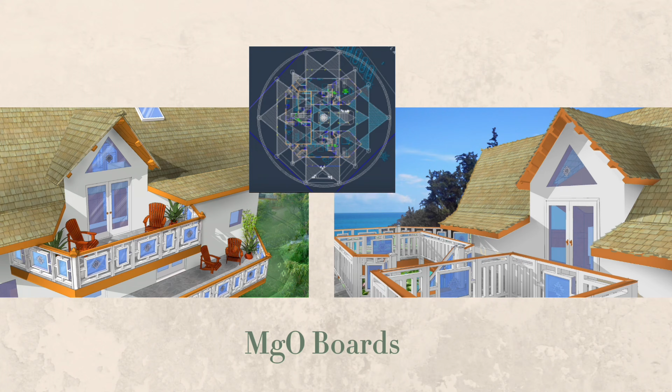I soon applied my architectural design skills to a multifamily project in Kauai where we used carbon-smart materials like magnesium board and Vastu techniques. So Vastu is the Indian practice of designing structures to achieve energetic harmony. I've always really been interested in these energetic design philosophies like Vastu and even Feng Shui. But for a time, I didn't really see them as that practical.

But the more I started to learn, I came to understand their true value. And I was eager to use them in my work. It would just be some time before I developed a reliable approach to do this. In the meantime, I spent most of my 20s managing a 10-acre property in Maui. It was there that I learned all the ins and outs of maintaining off-grid systems.

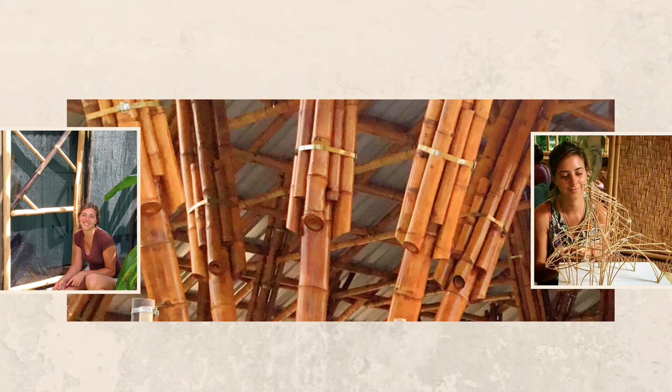I did a lot of hands-on building and renovating, and I even built my first house. At the time, I also lived next to a bamboo farm, and I would help them harvest the poles and build structures with the bamboo. I love bamboo so much, I went to Bali to study the traditional joinery of that craft and eventually worked for an architectural firm that specializes in prefabricated bamboo structures.

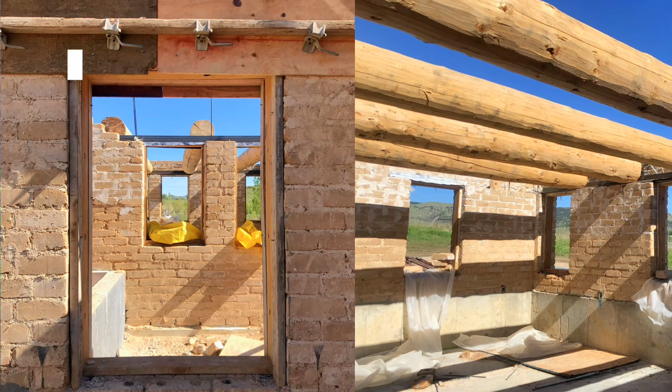Later, I moved to Colorado, a completely different climate, and so I started working with compressed earth blocks. So compressed earth blocks use locally derived earth under compression to make bricks. And so we use these bricks to design fire-resilient homes in that region. Today I work on projects all over the world.

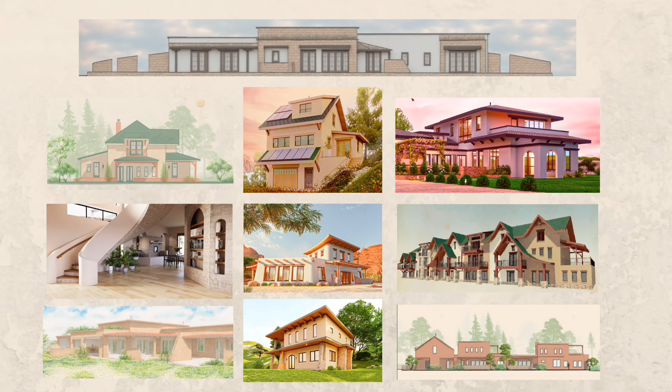I especially love larger rural projects that incorporate some kind of master planning where I can combine natural building, agriculture, and community components in a holistic way. I'm currently collaborating on a project in Kenya where we're designing a multi-structure complex using local materials and regenerative land management practices. I've also dialed in my approach to energetic design principles, and I call it elemental design.

So elemental design is this fusion between natural building, the traditional elements, and most importantly, understanding your climate. Climate-specific design is so important. It's frustrating for me to see buildings that don't use materials appropriate for their region. Elemental design aims to help people understand their climate, which results in more comfortable and durable buildings.

The natural building space doesn't have a lot of standardization, and so I wanted a framework that simplifies how we work with raw and natural materials. I wanted an accessible tool, similar to the way an artist would use a color wheel to draw parallels between color schemes. So in thoughtful design in connection with nature, our buildings have the capacity to be a force of healing, both for us and for the planet.

So my mission is to design places in alignment with the laws of nature, turning a building from a structure into a sanctuary. Sanctuaries are known for being places of refuge and healing. Its definition ranges from a wildlife sanctuary to even holy places such as a temple or a church.

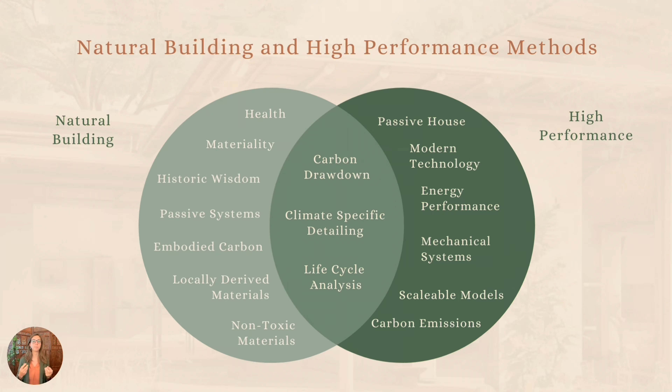So people on the natural building side are starting to embrace more high performance methods, and people on the high performance side are coming to see the benefits of materiality and embodied carbon choices. So what this typically looks like overall is carbon drawdown, climate specific detailing, and life cycle analyses.

Another pillar of elemental design is how energetic considerations impact our structures. Have you ever known something was off in a building but couldn't quite put your finger on it? When you look at its exterior or inhabit the space, it just feels wrong. This issue is often energetic.

Vastu and Feng Shui are both approaches to creating energetically harmonious spaces. Vastu Shastra is the Indian practice of spatial orientation, and Feng Shui is the Chinese approach. So these might sound mystical, but they actually align with practical building principles, such as ensuring adequate sunlight, ventilation, and thermal comfort.

Climate resiliency is the final pillar of elemental design, and this is what we'll really focus on today. This is a big one in the natural building movement, especially because a lot of people like a material or know how to work with a material, but it doesn't match the climate they want to build in. So we really want to understand the ecoregions. It's not just the big four climates. There's a multitude of microclimates within a region.

We're also going to look at site-specific design, really understanding the topography, the trees, the neighbors, all the landscape features. And thirdly, we want to prioritize land management. A lot of our designs are just about the house, but we have to prioritize the land first. How will we support a thriving ecosystem on the land? Our buildings should be designed based on how well nature will thrive around them.

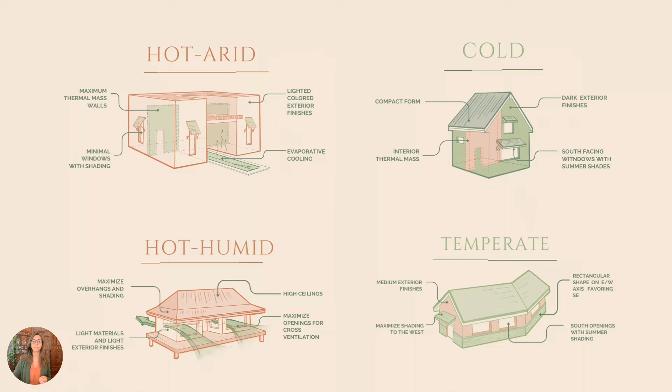So when we talk about an element, say water, we're not just referring to an ocean, river, or even the rain. Water also appears in our buildings as coldness, humidity, condensation, and even dew points. So, in the context of building, we also see that wood is correlated with framing, fiber insulation, and air. Fire relates to the sun, heat, combustion, and fusion. Earth is seen in stone, clay, minerals, foundations, and lime plasters. And metal we see as electricity, technology, and human innovation.

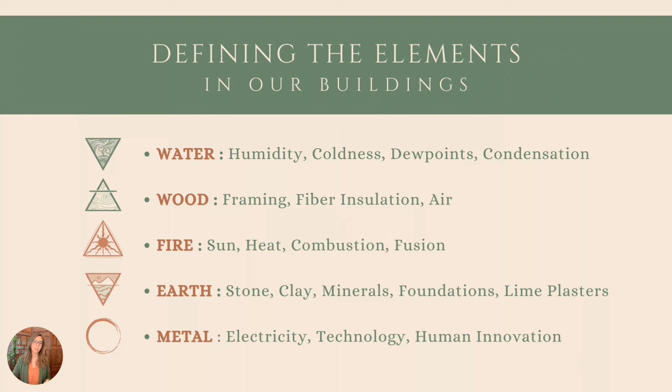When we look at the ancient Taoist philosophy, we find the concept of Wu Xing, and it dates back to 700 BC. Wu Xing is all about creating balance where each element is controlled and supported by the others. The elements relate to one another in different patterns called cycles. Once we understand the cycles, we can use them to relate our buildings to our climate in meaningful ways.

So, this is important because when we design a structure, we want to balance the elements we're using. For example, if we're building in a hot and dry climate, we can look to water and earth to balance out the harsh aridity of the surrounding landscape. When an element is deficient, we can look to the generating cycle.

In Wu Xing, the generating cycle, sometimes called the nourishing sequence, shows how each element supports the next in the cycle of creation and growth. The generating cycle is nurturing and supportive. In essence, it creates life. And so, in this way, it's often considered the mother cycle. An example of this in the context of building would be adding a metal roof for rainwater catchment and gutters with the metal element to channel and store water for domestic or agricultural use.

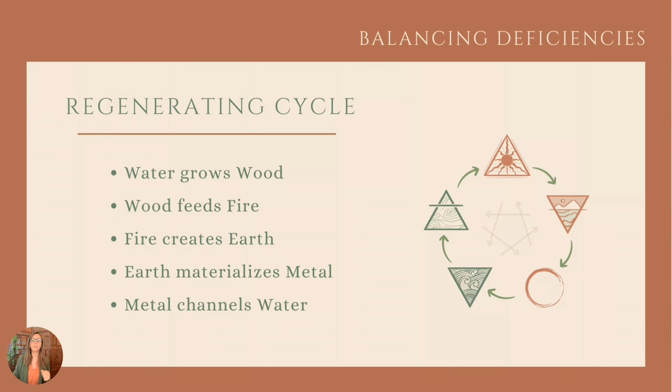So, if an element is in excess, we can look to the controlling cycle or the destructive cycle. In the controlling cycle, the elements keep one another from dominating. This ensures that no single element becomes overbearing. You can think of the controlling cycle as a regulating, calming, restraining, and even limiting force. It's also known as the grandparent relationship because when a grandchild becomes overenergized, the grandparent can come in as a dominating yet wise counterpart. So, one example of this would be using wood to provide additional tensile strength to a strictly earthen wall, like using straw in a cob wall, for example.

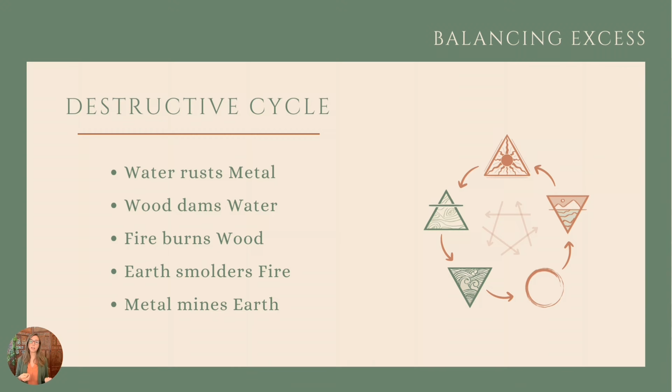The destructive sequence illustrates how the elements can destroy each other. The destructive cycle is a depleting and deathly force. However, it is not considered a negative thing in Wu Xing. Death and dying is a part of the natural cycle, and so we can use it to help balance out these excess elements. One example of this in the context of building would be using earthen materials in a forest fire prone area where the fire is in excess, since in the destructive cycle, earth smothers fire.

The five elements also correlate with specific climate conditions. For example, water is associated with coldness in the winter season. In architectural design, this can manifest in considerations for insulation and thermal control layers to manage cold temperatures and prevent condensation. Let's consider how the element water can affect our buildings and designs.

Water is the first element in the Wu Xing phase, and it's essential to life. But when it comes to our building envelopes, it can get a little tricky. Water must be very carefully controlled. Waterproofing is often the first thing we consider when designing or selecting materials for a building. It can come from exterior weather conditions and interior sources like cooking and showering. To manage water effectively, we focus on two crucial building control layers: waterproofing and vapor permeability.

Excess water is present in climates with high humidity, consistent rainfall, and even many days of cloud coverage. If we have too much water, we can control it with earth. Earth includes inert, non-biodegradable materials like stone, clay, and minerals, and it can overcome water's challenges. The banks of a river contain and channel the flow of water. So, in natural building, our water control layers are often some kind of plaster, which is an earth element.

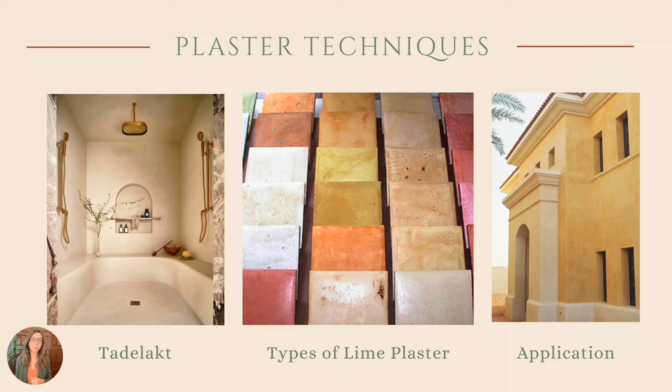In Wu Xing, there's a cycle I haven't touched on yet. It's the inner cycle. So in this case, it's a combination of the destructive cycle and the controlling cycle, acting simultaneously. So one unique climate we can look at for mitigating water is hot and humid climates. Absorbing humidity through clay, silica, cork, or other means is not enough because these materials can only absorb so much water.

It's difficult to use fire, like solar or a wood stove, to dehumidify if the climate is already inherently hot, right? So even cooling tubes, which can cool the space, will not always dehumidify the air enough. So we need to look to mechanical means in this scenario. Elemental design in the inner cycle backs this up. We see three relationships in action here: fire reducing humidity, heat powering the mechanical system, and the mechanical system absorbing the humidity.

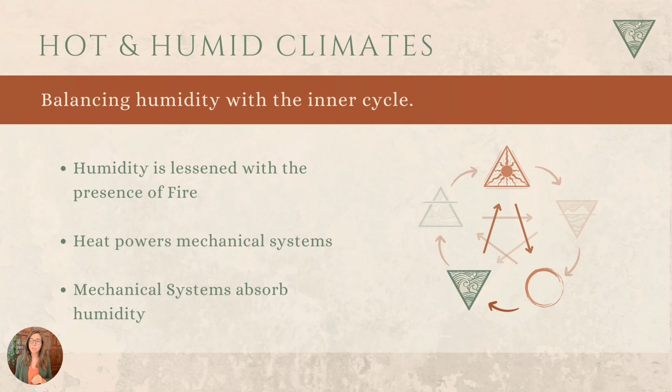We've discussed how to balance an excess of water, but what about a scarcity of water? We do this by harnessing the power of metal, also known as ether or innovation. Metal elements can help to channel or contain the flow of water. We see this in pipe systems and in rainwater catchment, flashing, and metal roofs.

This is essential in dry climates where they don't want the water to evaporate, and so they pipe it to keep it running and abundant. I'm not sure if this is a good solution across the board, but it's a good example to show how metal can protect the scarcity of water as a means of containing it. So let's move on to the next element, wood.

Wood refers to any plant based or biogenic material. The porous nature of wood gives it insulating properties, which is often why it's sometimes considered air. It also has a unique ability to sequester carbon from the atmosphere. So here are some examples of the use of wood in our homes. We see straw bale, mass timber, cross laminated timber, and hempcrete.

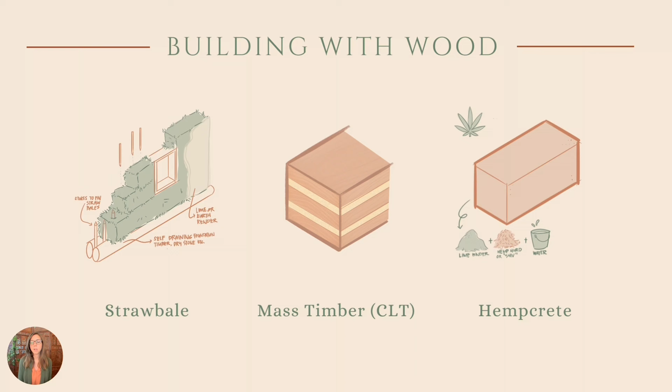One reason they're so popular is due to their insulating properties, carbon sequestration, and in some cases, the use of agricultural byproducts, which also contribute to a circular economy. Another way to look at wood as air is through the carbon cycle. Wood has an incredible capacity for sequestering carbon. As a tree grows, they absorb carbon dioxide from the atmosphere, storing it within their stalks, roots, and leaves.

As wood grows, it goes from being mostly water to solid wood to mostly air. And then when it's ready to go back to the earth, it releases its carbon. So that's why harnessing it at its lightest stage, right before it shifts to releasing carbon, is how storing the wood element in our buildings not only insulates, but keeps the carbon from being released back into the atmosphere.

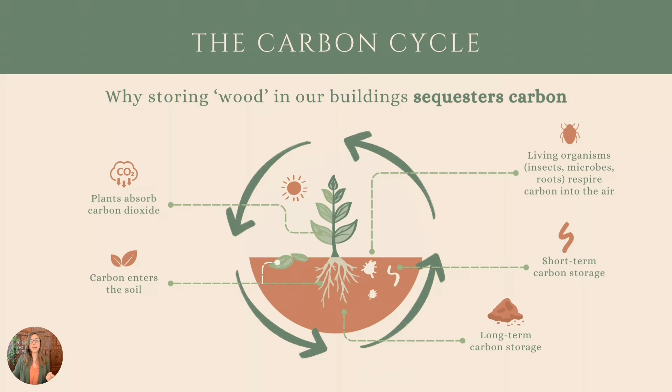When there's too much wood, we look to metal. Proper forest management not only improves the health of the forest, but it helps us shape our homes. By cutting back and thinning the forest with the metal element, we actually create space for more life to grow. We see this with coppicing.

Many trees thrive on being cut back, sometimes all the way back to the stump. This becomes a vital resource of biomass to improve soil health. It also helps mitigate wildfires and becomes an abundant source of building material. When we build with wood, we often need screws, fasteners, and brackets to assemble them efficiently. These not only provide extra reinforcement, but can be useful for seismic and structural considerations.

Having too much wood in our homes, while beautiful, is not necessarily practical in the eyes of elemental design. During my time living in the tropics, I became savvy in building with bamboo, a wood element. I was captivated by its rapid growth, its abundance, and its remarkable strength.

After visiting Bali and learning the joinery techniques, I realized two things. First, this was a highly skilled job, and second, it was a dying art among the coming generations in Bali. And as much as this saddened me, I was also impressed by newer technologies that make building with bamboo simpler and more cost effective. Back in Maui, the bamboo construction consisted of tying bamboo poles together with metal strapping. So, this is an example of how wood can be balanced with metal.

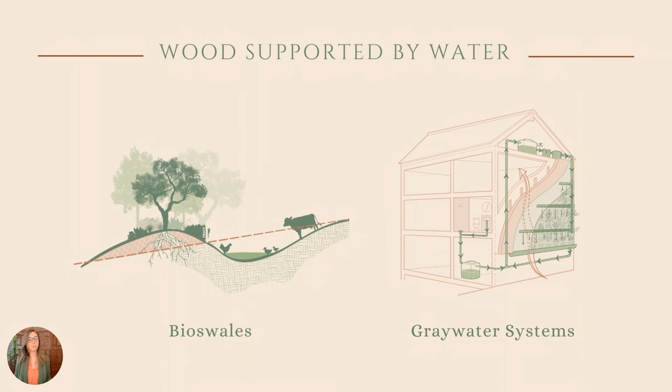Our next element is fire. Fire represents heat, energy, and light. In the context of building design, fire is both a vital resource and a potential hazard that must be managed carefully. My friend Mel broke my heart when she described watching her beautiful home burn down. She said it lit up like a tissue box. Actually, I knew a few people who lost their homes to a fire that year, and it was a reminder of the extreme flammability of wood framed homes.

This experience reinforced my commitment to designing with more climate considerations and using fire resistant materials like earth in these types of climates. So, if there's too much fire, it's controlled with water. So, here we're going to look at evaporative cooling, humidity and pressure, how we can move air, and wildfire resiliency.

Do you ever notice on a really hot day that simply being near the water feels refreshing? You don't even have to go swimming or even touch the water, and you still get that sense of relief. That's called evaporative cooling. Evaporative cooling works best in climates with low relative humidity. So you'll see these techniques mostly in hot and dry climates. For example, a pool can simply cool the air around it as the water is evaporated. If a fan or a breeze is directed over the pool, it can pull the cool air into the spaces that need it most.

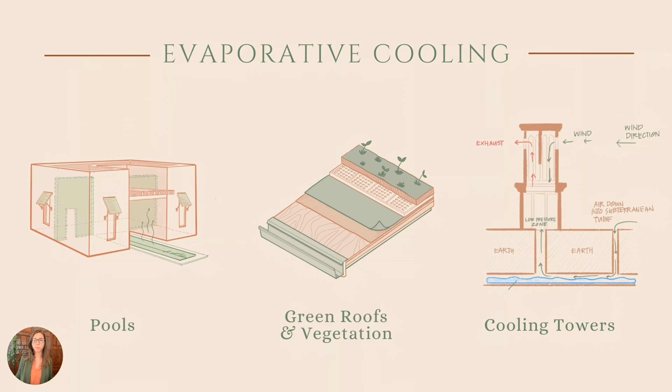And cooling towers can be designed in really hot and dry areas. These towers and tunnels capture the prevailing winds and basically replace the hot air below. And then at the same time, they have these channels of water running below the ground. And so it sucks up the air from below and has this passive evaporative cooling effect. So water actually moves air.

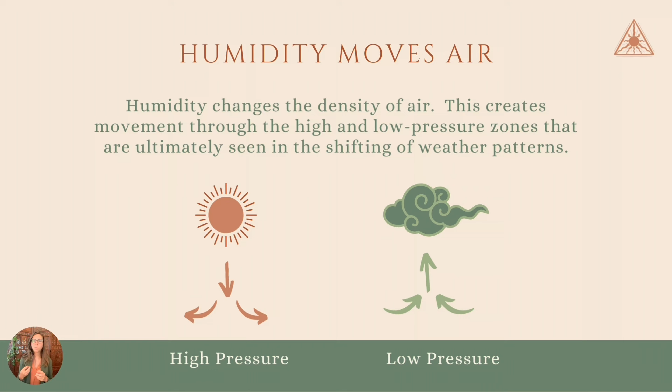Humidity changes the density of air. So this creates movement through the high and low pressure zones that are ultimately seen in the shifting of weather patterns. So when we're designing for passive ventilation, we're looking for those high and low pressure zones. In this case, water is acting a little bit like air. You'll hear in the passive house community that air is considered lazy. And while this is true, there are still passive design systems we can implement to create high and low pressure zones, which convince that lazy air to move.

Breezeways are a great example. They create high and low pressure zones. So if you have a prevailing wind coming through a breezeway, that creates a high pressure zone. And then if you have those windows and doors open on either side in a low pressure zone, the air will be moved through passively because of that pressure differential created.

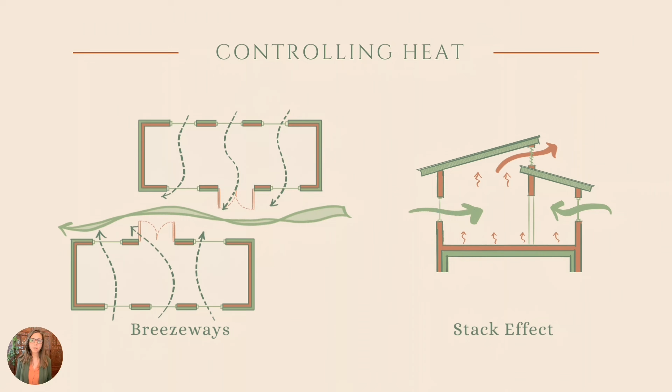Another example is the stack effect, which is also called the chimney effect. So warm air in a building rises, creating a low pressure area below. As the warm air exits through the openings in the building's upper level, cooler air is pulled in through the openings in the lower level. This creates cross ventilation of cool air through the space.

You can also vary the location and size of the openings, forcing the air to take a less direct path. Air movement will increase inside the space when there's more twists and turns. Changing the path of prevailing winds can also be achieved by using vegetation or other man-made objects. The Venturi effect is when the speed of air increases as it's funneled through a smaller space. So, this can also increase the passive cooling effect.

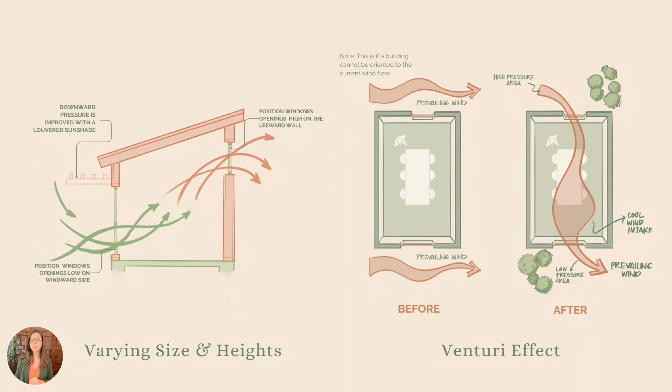It's good to remember that these types of systems require occupancy involvement, like adjusting the sails of a ship. We have to open and close windows depending on the external circumstances. Hopefully, in the future, with human innovations, these systems can be automated with the option for manual use as well.

I want to sidestep over to fire resilient design while we're on this topic of controlling fire. So, here we see the destructive cycle at work to mitigate wildfires. In this case, earth smothers fire. So, we can use earthen materials such as lime plasters, cementitious boards, etc., surrounding all areas of the soffits, walls, and roofs. If fire feeds on wood, we can look to the reverse by minimizing its use.

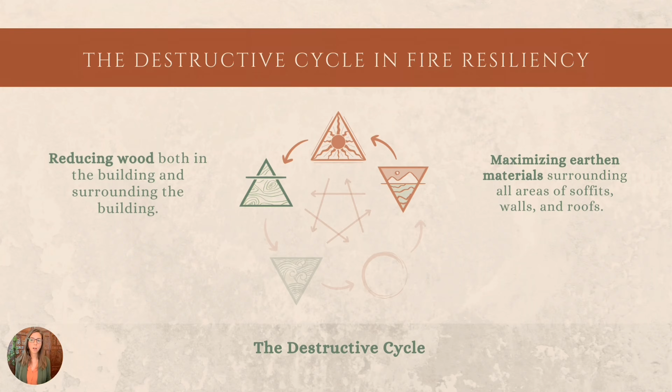We can trim woody overgrowth in surrounding landscaping and minimize the use of wood overall on the exterior of the building. If we don't have enough fire element or heat, we're going to address this with wood. Wood stoves are a great example. Even though I know they're catching some flack, especially in cities where people worry about carbon emissions. I get that. But out in the country, if you're surrounded by trees, it seems a bit unfair.

While burning wood does release some CO2, it can be sustainable if we're smart about how we harvest it. Also, modern wood stoves are super efficient. There's safety concerns, but as long as you follow the rules of proper ventilation, dry wood, and a good stove, you're good to go. Wood can also help store heat when the wood element is used as insulation, like we discussed before.

When there's a scarcity of fire, we can also look to the regenerative and controlling inner cycle of wood, fire, and metal. For example, when we fan the flames, we can move air via a fan to ignite the wood and create warmth. Circulating air here is critical to distributing heat throughout the home. Passive solar is another good example of this in cold climates.

So, by using our own ingenuity, technology, which represents the metal element, and the shaping of structures with wood, we can increase the solar heat or fire element within our homes. So, here's how we can achieve passive solar design. First, let's align our buildings 10 degrees to the southeast, or northeast if you're in the southern hemisphere, to maximize the morning solar gain, warming the building when it needs it the most.

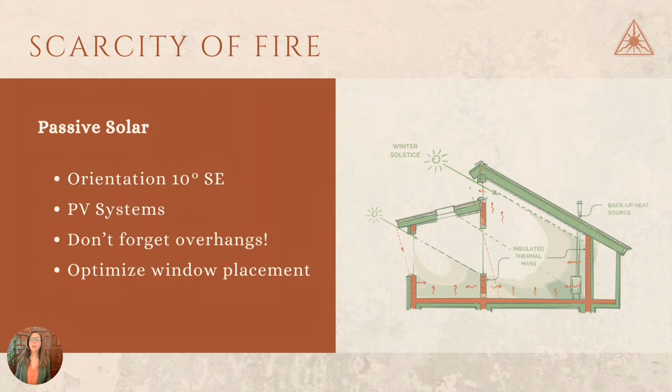If we want more active support from the sun, we can install a PV system, making sure our roof pitches align with the angle optimized for that latitude. Designing overhangs is often overlooked. Overhangs can block the summer sun while allowing winter sun to penetrate the building. The calculations are actually quite simple to account for the winter and summer solstice. All we need to know is the latitude your building site will be on.

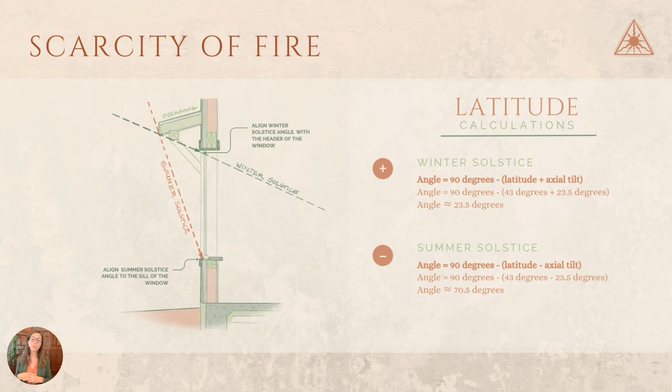Overhangs not only help with passive cooling, but they can also act as additional protection for the exterior plaster or cladding of the walls, and even help mitigate water damage at the headers of our windows, a place that is highly vulnerable to leaking. Optimize window placement, size, and glazing to maximize that natural light and heat while minimizing heat loss.

So the rule of thumb is 7% of your window size to the floor area, and then up to 11% with plenty of thermal mass. Storing heat with thermal mass is like nature's battery. With thermal mass, we can store fire in the walls or the floors of our buildings.

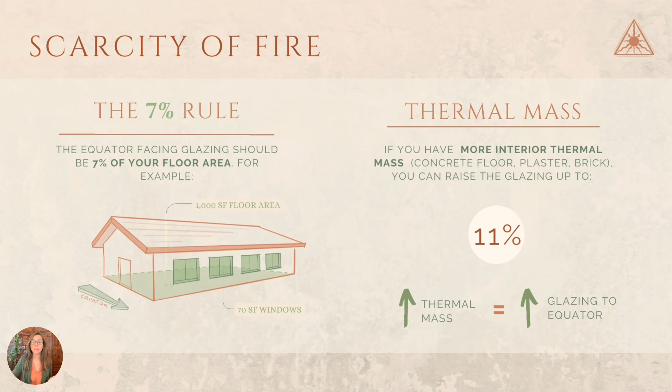So, earthen materials such as stone, concrete, and brick can also absorb heat during the day and slowly release it at night. And don't forget, in cold climates, insulating thermal mass from the exterior is essential.

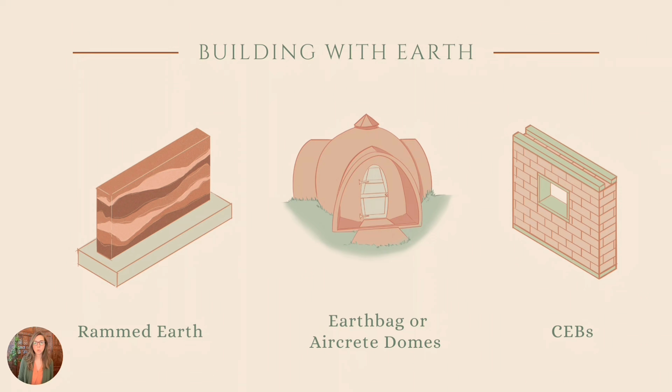Moving on to Earth. So, as I mentioned earlier, Earth is anything inert that doesn't contain biodegradable material. Earthen building materials are stable, solid, and durable. So, examples of strictly earthen wall systems include rammed earth, earth bag, compressed earth blocks, and aircrete. Many of these balance the correct ratio of clay, sand, and aggregate and are often tamped into compression. So, these systems work well in hot and dry climates.

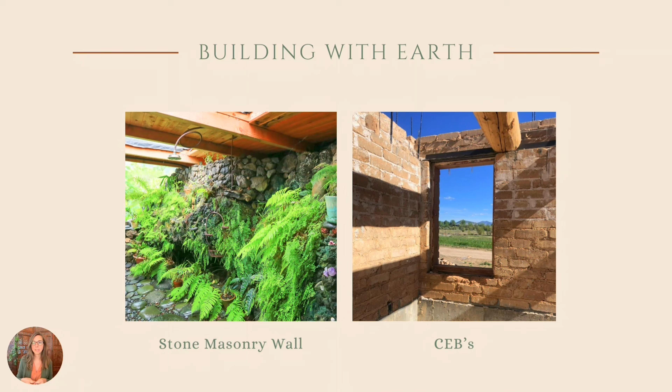So, here are a couple examples. Several years ago, I helped build a 3-story casita into the bedrock of a cliffside. And we merged the foundation with the bedrock, and it felt very secure for being on a literal cliff. Later, when I moved to Colorado, I started working with compressed earth blocks, like I mentioned before. These blocks are made from local earth and compressed into durable bricks and are a resilient building material in that climate.

To balance excess earth, we control it with wood. Because earth is so durable and solid, it often lacks that flexibility that wood provides. In my personal experience working with earthen wall systems, we often still need framing members around windows and doors, blocking to mount cabinets on, etc. So, drilling into earth can also pose problems and require special tools. And it's also a challenge to install and maintain plumbing and electrical without framing out chase walls. So, wood provides the necessary structural support for mounting and framing.

Although earth can hold up to a variety of scenarios, including temperature and moisture, it often falls short with seismic pressure. We often see reinforcement with rebar, but the more sustainable choice would be to reinforce with wood. Actually, many countries lean on simple and primitive systems like using bamboo as reinforcement in earthen structures instead of rebar.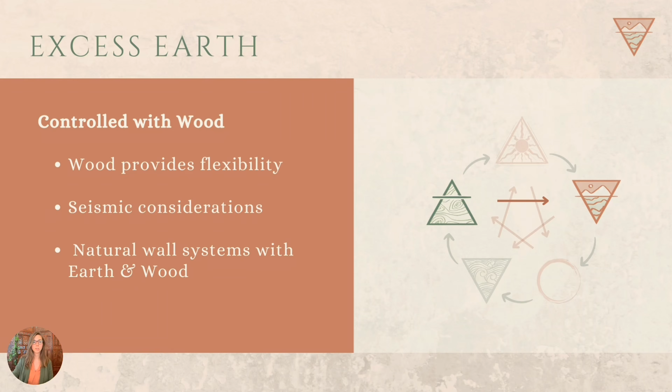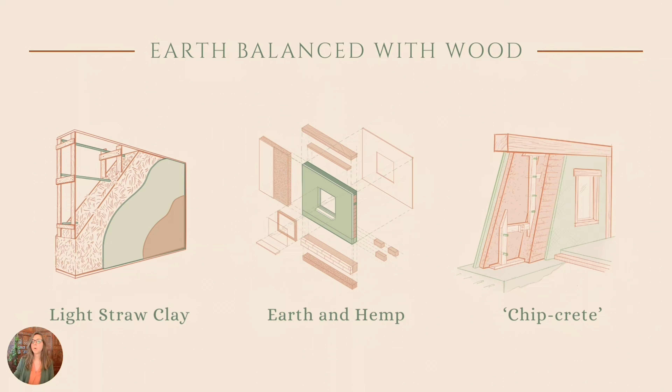Some natural wall systems use both earth and wood, like light straw clay, hempcrete, light adobe, and cob. The natural fibers act as a binder for tensile strength while also offering some insulative properties, depending on the amount used. Hempcrete is a great example of earth balanced with wood. Biogenic-based materials like hempcrete and light straw clay are a good example of this natural inner cycle. So you'll see here the wood element is the hemp or straw fiber, the lime is our earth, and the water is, well, water. The wood absorbs the water, which holds the diluted lime or clay that ultimately petrifies the wood fibers.

The insulting sequence or the counteracting sequence is essentially the opposite of the controlling sequence. It's when an element that typically controls another is instead weakened. For instance, excessive volumes of wood may defeat small volumes of metal. An axe can be broken or dulled after chopping down multiple trees. This is why it's also considered the insulting sequence.

Just remember that these types of systems use a lot of water and need time to cure. And that can take months depending on the weather conditions. So just know your climate before including any kind of water in your wall system.

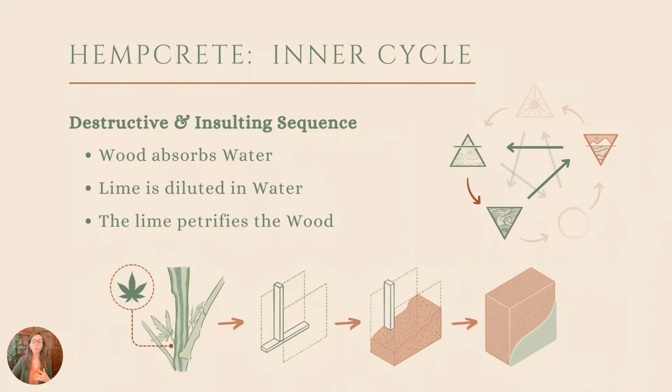We balance a scarcity of earth by looking to fire. Earthen materials become stronger when they're fired. Just like a clay pot has to go into a kiln to be strengthened, materials like bricks and terracotta are fired. Other earthen materials are dried or cured in the sun. We see this with adobe, compressed earth blocks, and even cob.

Earthen bricks are an example of bricks fired with both wood fiber and clay at low temperatures. Although they cannot be exposed to the exterior elements like a regular brick, they are still much stronger than an adobe brick, which is simply cured in the sun. We see this also with the lime cycle used for plastering. So the limestone must be heated to turn into quicklime to be utilized in our buildings.

And last but not least, we have metal. Quite honestly, metal is very difficult to describe. In essence, it's the unseen. It encompasses more than just physical metals. In the context of elemental design, metal includes technology and even has somewhat of an energetic connotation.

As technology and innovation, metal involves the integration of modern technology into our living spaces. So, smart home systems and energy efficient appliances go a long way to enhance our comfort, efficiency, and sustainability. But relying too much on technology can lead to this imbalance. So, we have to use technology mindfully, ensuring it improves our quality of life without overwhelming our natural surroundings. When we want to balance excess metal, we turn to fire.

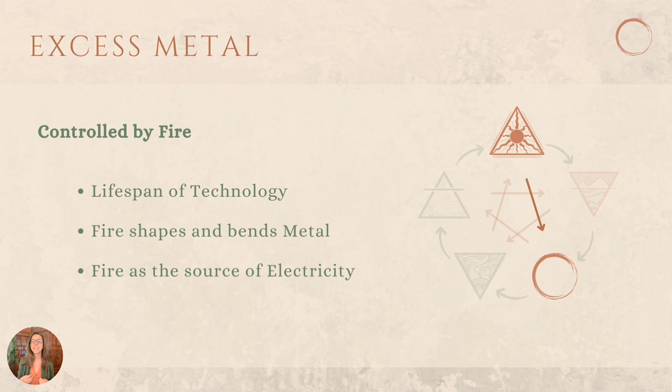Solar panels convert sunlight into electricity. Fusion power harnesses the same reactions that fuel the sun, and it represents a future potential for clean energy. In today's world, our energy is dependent on these fiery sources. Having a scarcity of metal isn't always a bad thing, since metal is so carbon intensive. However, if we need more structural support and we don't have access to metal elements, we can look to earth, like using earth-based building materials to reinforce a metal frame.

And I'm going to mention fossil fuels here. Although we know how unsustainable they are, they do still come from the earth and are our primary source of generating energy. So it's a perfect example of earth generating metal. Geothermal systems are perhaps more sustainable and allow us to tap directly into that regulating energy held in the earth. We can also lean on Earth's thermal mass for storing and slowly releasing energy over time. If we have a scarcity of mechanical systems for heat, Earth and thermal mass can help make up for that lack.

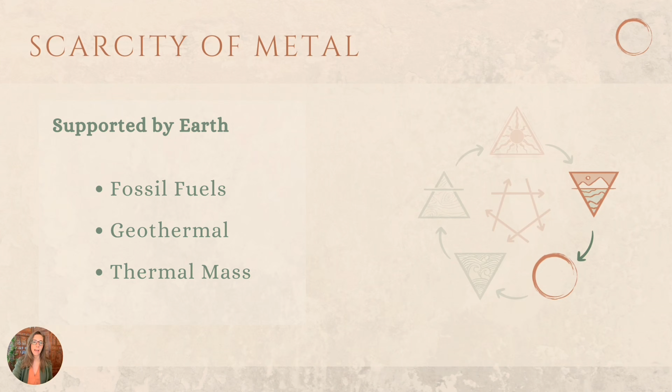I have noticed in the natural building community that there's a general aversion to mechanical systems. And this is just a generalization, but it goes against the balancing principle of metal controlling wood. So, bringing fresh air into our buildings is very important. For example, if on a cold day we want to keep the heat in and not have to open a window, we have to have a means of bringing fresh air into the house. So not only does this minimize the natural buildup of CO2 from the air we exhale, but it can also help manage humidity within our homes.

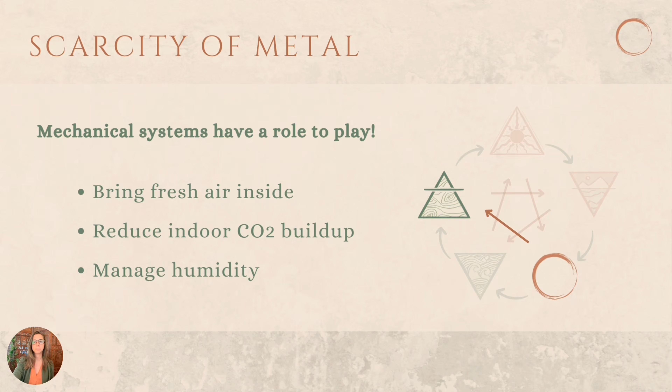To close out this section on metal, I want to remind us that metal is also considered ether and has somewhat of a spiritual connotation. So many sacred buildings throughout history were built with deeper intentions of inspiration. From the intricate details of a stained glass window to an inlaid floor, these buildings were vessels of spirit. Their creators were serving a higher purpose or working for the simple act of creation itself. And while we don't see these intentions, they're infused into the building.

So next time you visit a famous building, along with observing its architectural features, see if you can envision some of these unseen factors. What intentions might the builders and designers have had? What effect does this have on the overall feeling of the space? Many of these unseen elements really do create a sense of balance in our environments, and perhaps without our knowing, increase our quality of life both physically and energetically.

Elemental design is about creating spaces that are in harmony with nature, resilient to climate challenges, and considerate of our overall well-being. It's a practice that brings together ancient wisdom and modern technology to ensure that our buildings are not just structures, but sanctuaries.